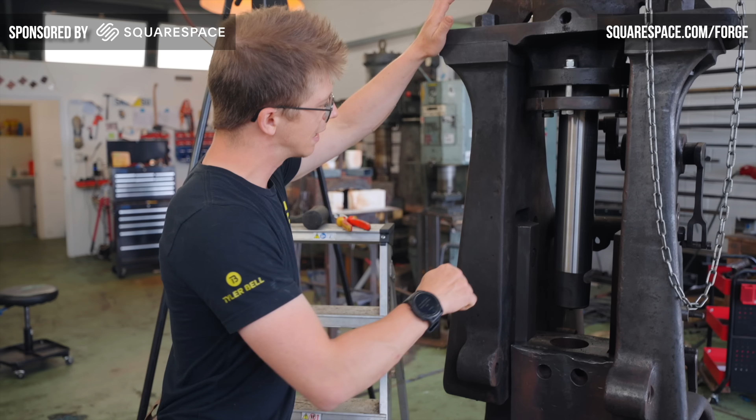This is episode 438 of working on this steam hammer. Now, we put this shaft back in yesterday, squeezed our graphite gland packing inside of the bottom of the cylinder, but we then noticed that it was a little bit too tight. Step one, troubleshoot. So I'm gonna try and loosen off this gland a little bit and see if we can get it squarer, because I think it's bound up.

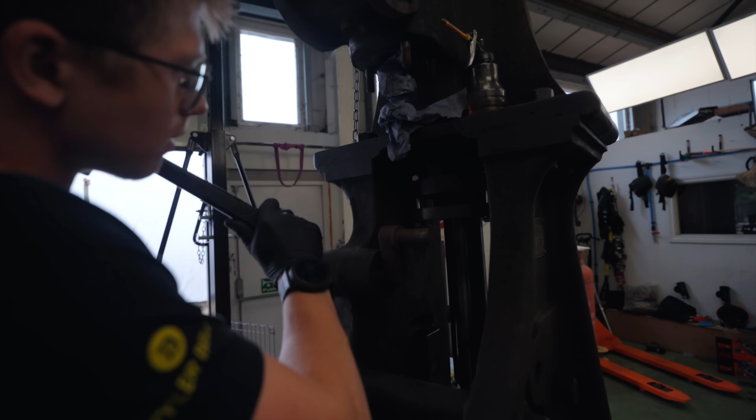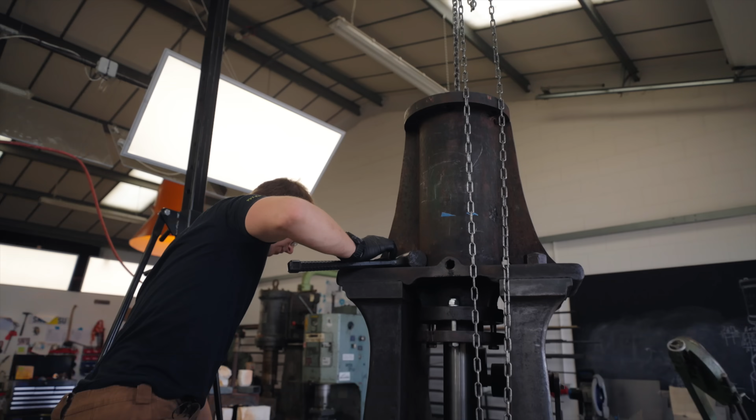You know what I did, Jamie? I just spun it round 180 degrees so that this was in line, and now it goes all the way down. Hey, you know what would be cool? See if we can get it to lift up under air pressure. What do you mean, how? We have ourselves a threaded hole here. We have 100 PSI. The question is, do we have enough volume, and is there little enough leakage that it would actually lift it? Let's see what we can do.

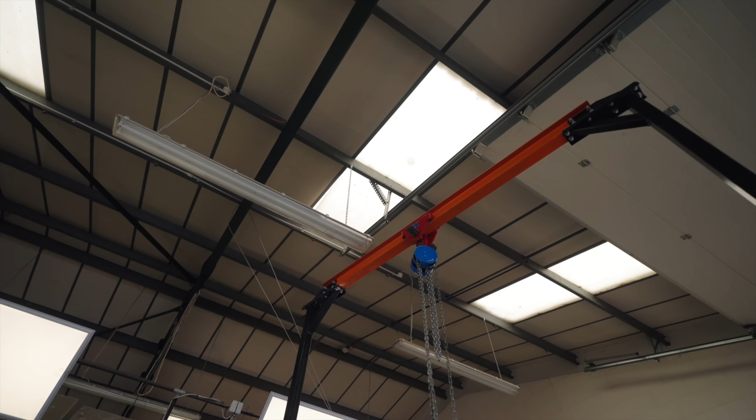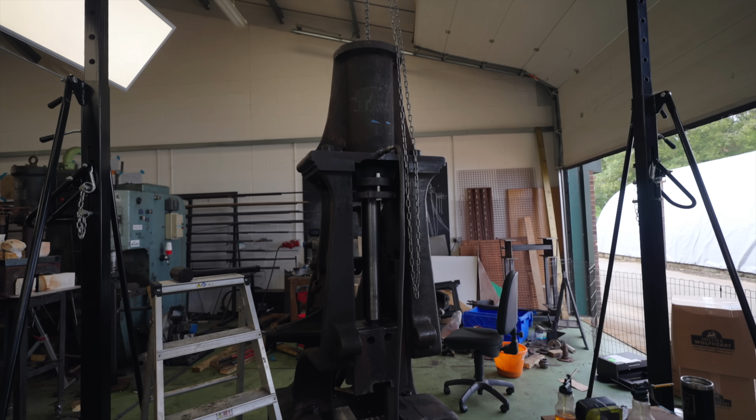Jamie, can you imagine? We open up the air pressure and just shoot the ram all the way out of the cylinder. Straight through the ceiling. There's no chance that happens, but you know, a boy can dream. It did just work out that there's no way this is gonna work. It's just gonna escape out of the back valve. But anyway. Sounds cool, but nothing happens.

Thank you so much. Have a lovely day.

Really appreciate it. Bye. All right, just got some very helpful advice from the great and talented Mr. John Nicholson. Context: this is the gentleman that now owns and runs Massey Forging. The man knows a thing or two or three about power hammers, and he just gave me some advice on what our next steps should be in regards to fitting this ram tup to this piston.

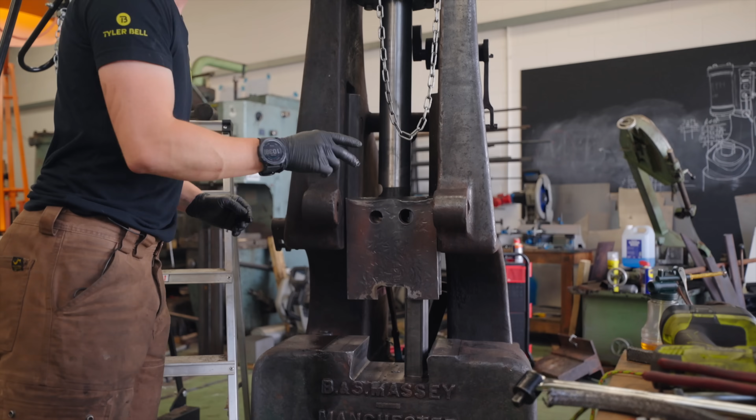Effectively, I have been warned to be careful about how this stuff fits and find out whether it's going to fit right, or whether the fact that we have ground down about 2 inches worth of this taper means that it's not going to stick in here. Because if, when this was big before this shaft got ground down, the bulk of the contact was happening in this bigger area and not down there, it could be that it's loose.

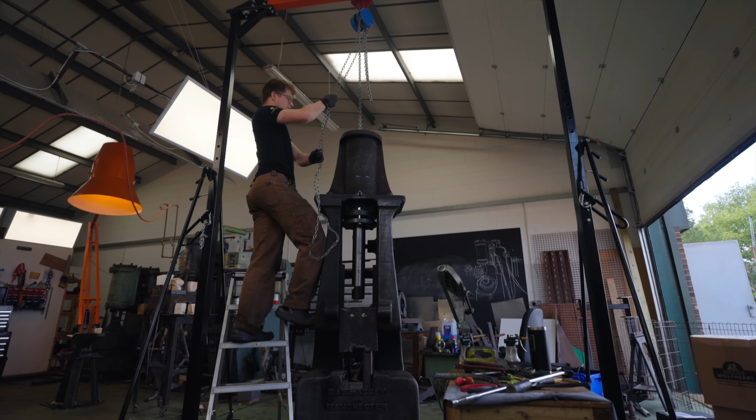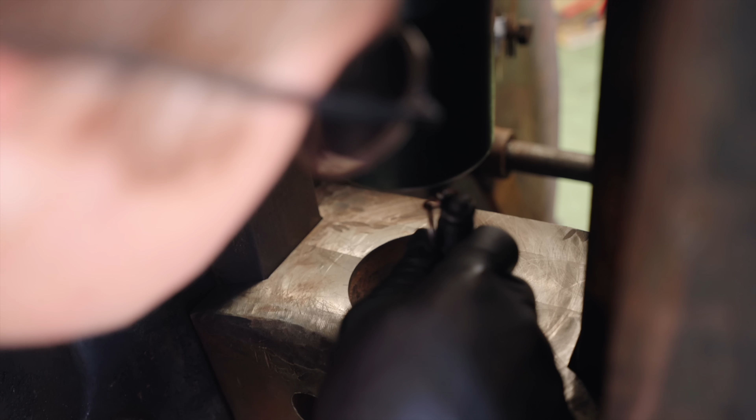But if the tapers match up perfectly fine, it should still be fine. It's just there'd be 30% less contact with the taper that's in there. Remember, this is held to that through this kind of 1 degree taper forced in. A little blue on her. What are we going to say, about 3 millimeters or 1/8 of an inch from fully at the bottom of the taper. Hiya! Contact all the way down there.

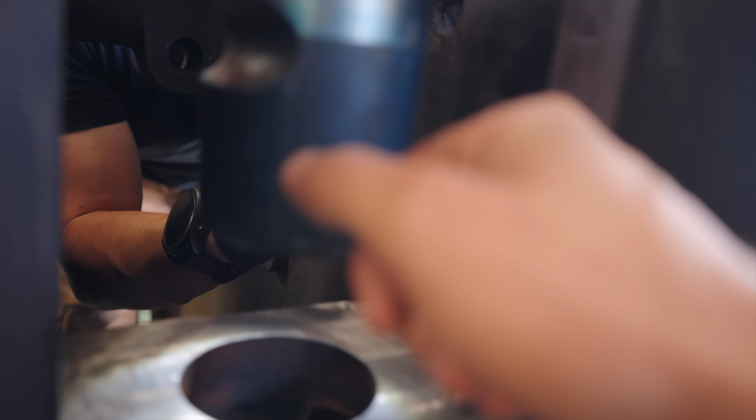What we're saying is barely no contact at all. What does that mean? Barely no contact? Barely any contact? Well, yeah, there's barely no contact. Huh. You mean barely any contact? Well, no, there's barely no contact. Barely no contact means there's a lot of contact. Are you trying to say there's a... What is the use of language you're trying, like... You're gonna help me here, Jamie. Yeah, maybe you're right. I'm saying it's barely touching. Oh, so the opposite of barely no contact.

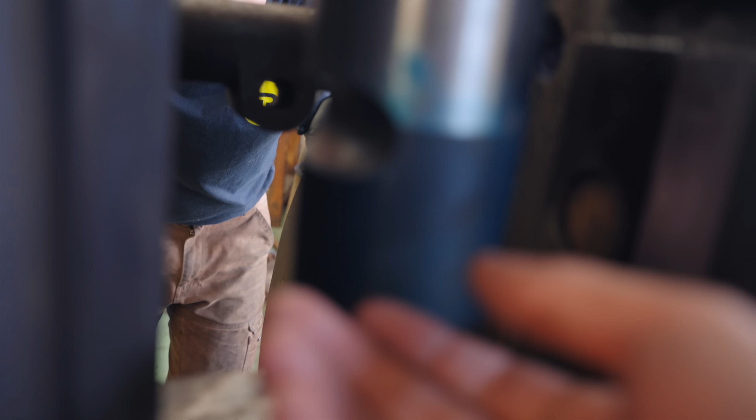This time around we're about 1.5 millimeters away.

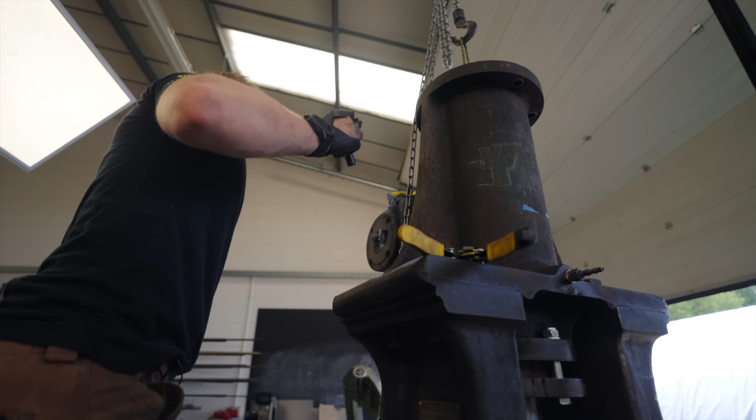What I've been doing now is checking the contact between this and that. We may have to go more in depth on this in the future because the grinding of the shaft has shortened the amount of friction that we get between this taper and that hole. And so if these 2 pieces are coming loose in the future, we've got a little bit of a strategy, a potential solution for fixing that. But for now, we can jam this puppy back in there, and then I think we have a look up here.

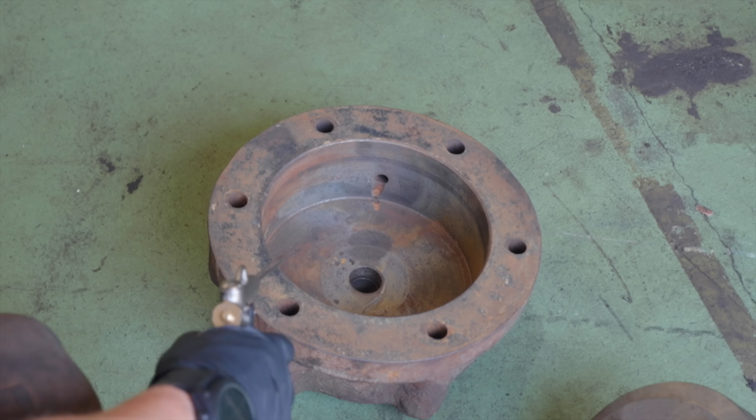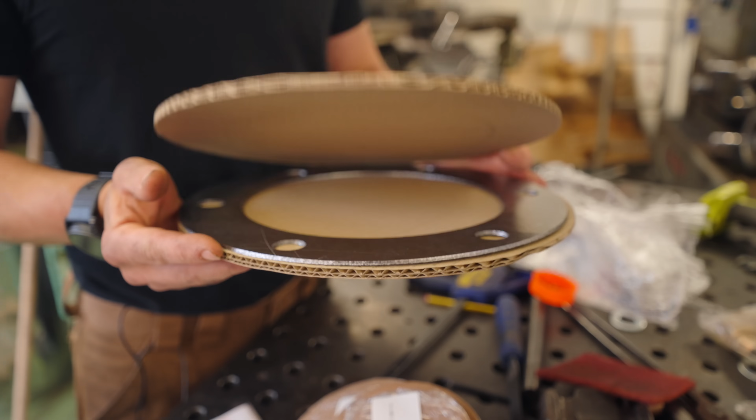All right, keep your fingers and toes well clear, folks. Okay. All right, up we go. Ta-da. Now, gaskets. Remember we bought this bad boy right here? Well, didn't tell you, I also bought something even better. And here, there's the power of CNC. Hallelujah. That's going to be so much better than anything I could have done. Let's pray they line up.

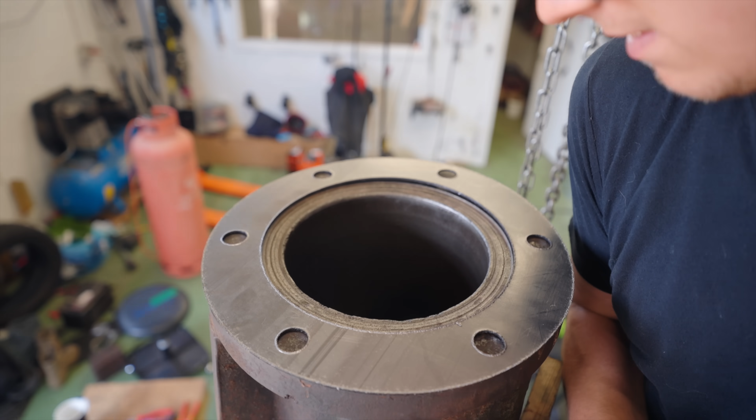Oh, lovely. Doesn't get past the piston rings. Kidding me. We'll put it on first and then put the piston thing on top. I'm very appreciative that one of us here has some sort of brain power. You know what else I should do? Take this thing out. Right. Yeah, the rope and the nuts. Could you imagine? Heavy. Oh, yes.

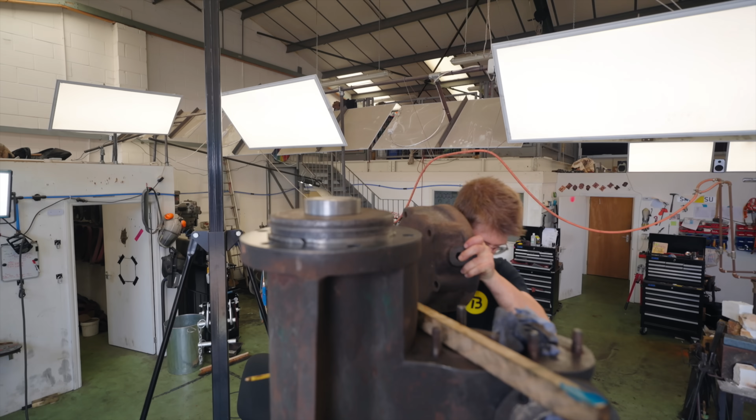Okay, now there's piston rings that need closing. Right, what's rule number 1, Jamie? Don't stab yourself in the eye with the screwdriver. I thought you were going to say don't talk about Fight Club.

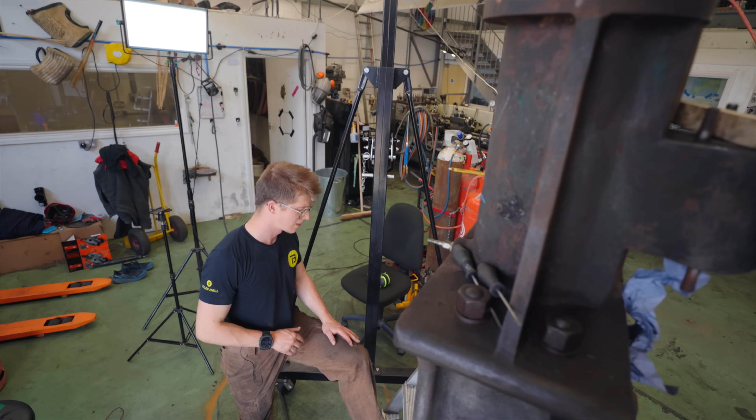Oh. How am I going to pinch those piston rings, guys? Maybe I should have assembled it upside down? But then how would I get it on top without it falling out? What, like putting a glass of water on a table upside down? It's exactly what I would need to do. Isn't there a magic trick to do that? You could just watch that and use the same concept.

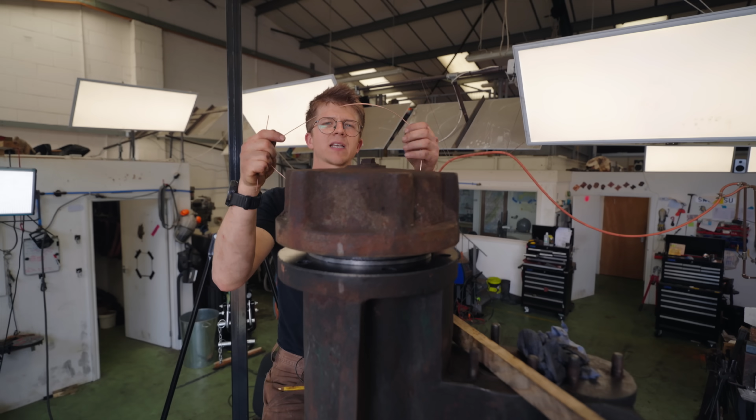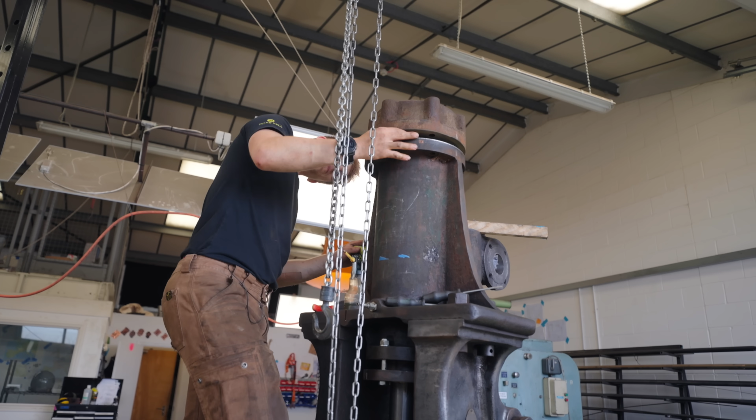It's like I need a big Jubilee clip. A big Jubilee clip! I'm gonna be right back. I'm going up to the office. 2 Jubilee clips. It's still not big enough. You don't think? Is it not big enough? No. Well, we can use it as inspiration. Woo! It worked! Look at that, it's down. There's one long bolt. Maybe.

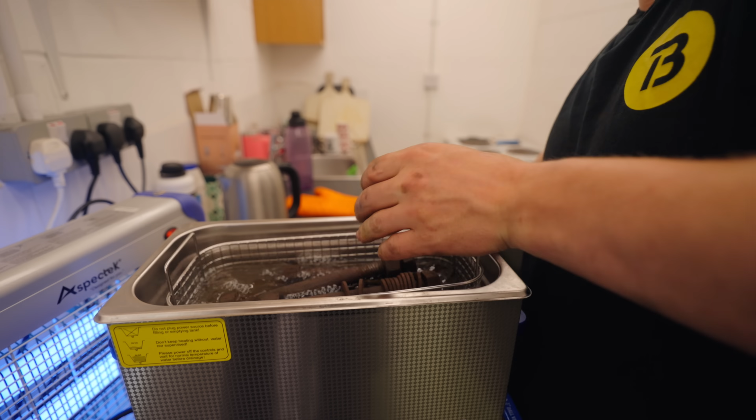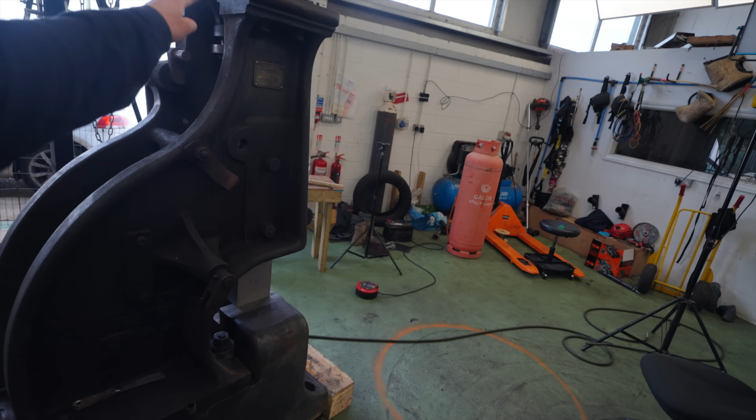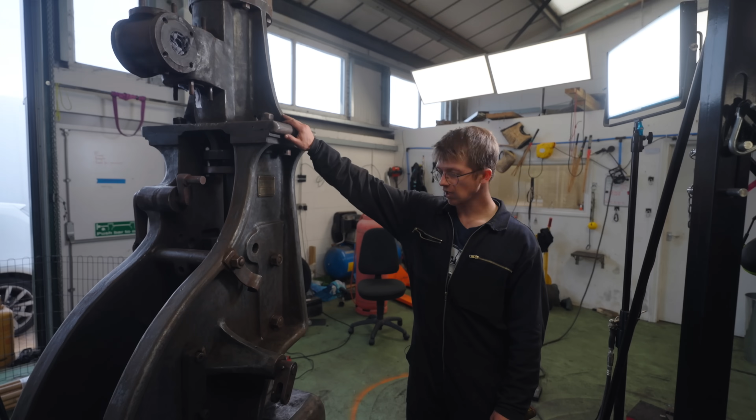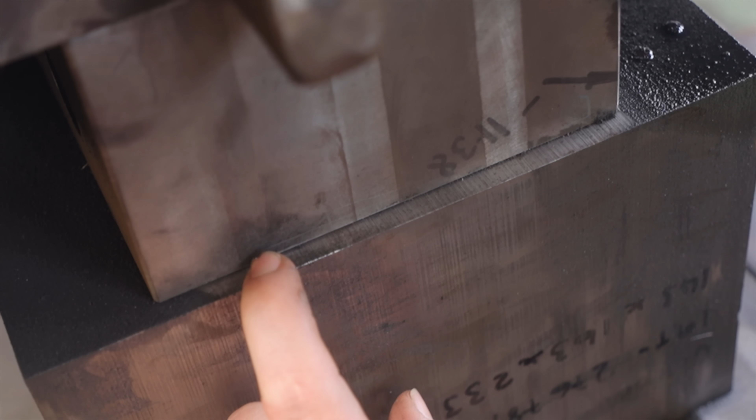Righto, before this thing gets put together anymore, we have to make the other side match this. More wire wheeling is required. I've made headway here, getting the bulk of it off. It's time to get this bottom die cut. Now, there are some important things that we need to consider, which is 1, I want the top and bottom dies to be the exact same width from front to back. This is sawn material, so it's cut with a 3mm tolerance. And so of course, it's not perfectly square, and that's completely normal. So you'll see that we're currently about 5 or 6mm, about a 1/4 of an inch proud on this side. So we've got a lot of material to take off there.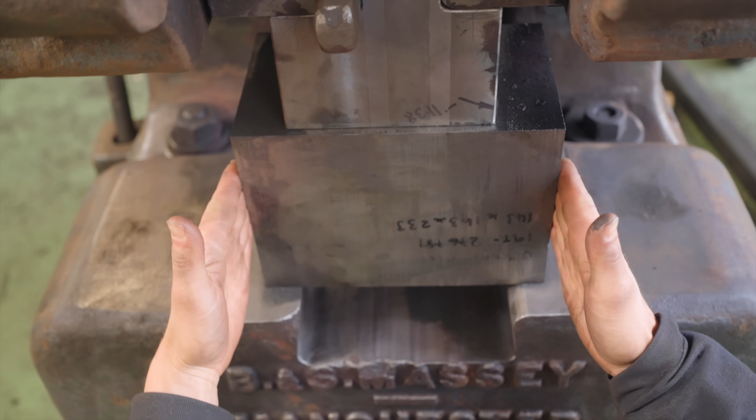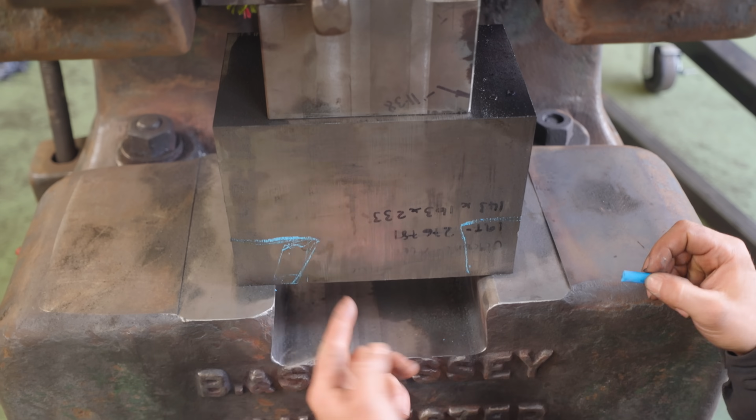The entire block needs to be squared, but also I need to make sure that this block sits perfectly in the middle, this way and that way, to that die. And what's going to be crucial for that is where exactly we cut this dovetail. It's less critical over here, because of course, once that's cut, we're gonna put a key in this dead space. We can make the key fit after the fact, like we did up here, easy peasy lemon squeezy. But if this is off relative to that, that's not going to be centered.

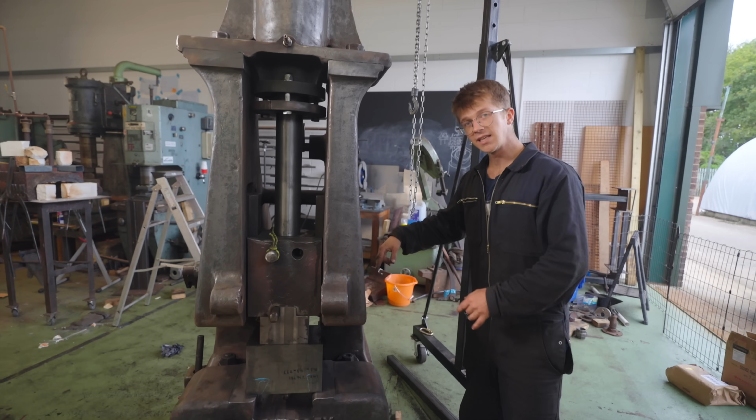And we must remember that despite our best efforts to cut this dovetail in as straight a line as possible to this base, i.e. not like that, not like that, there is so much room for misalignment. Remember, this frame is just installed with 4 bolts on rails. The whole thing could be twisted. This top or ram head was an absolute mess with no square, nothing on it, which means that that die might not be square to the frame. The frame might not be square. There is absolutely nothing to go on that is perfectly square, but we need the dies to line up just right, and we can't have any misalignment between these 2 contacting surfaces.

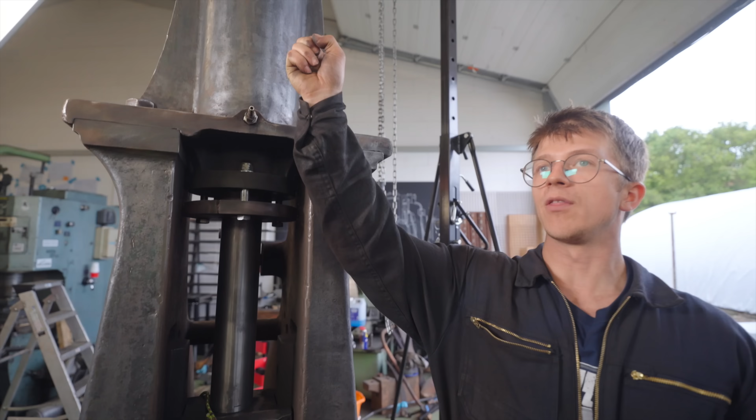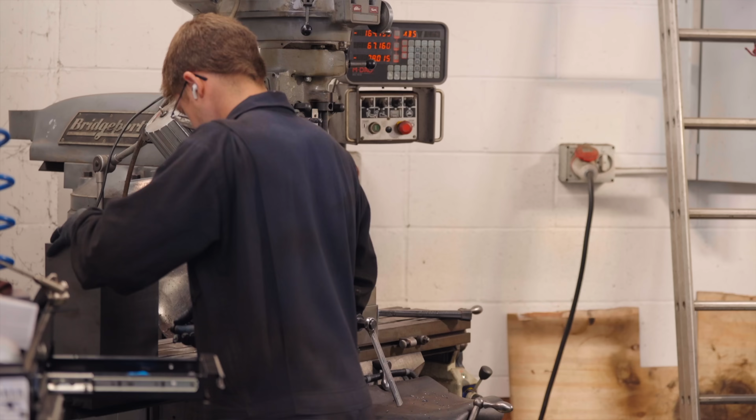Any sort of misalignment is going to make these twisting forces when the hammer strikes. Twisting forces when the hammer strikes is going to cause excess wear on these guides. It's going to cause excess stress on this piston rod. The result is it wears the cylinder more, though this machine ultimately is just a lot of force slapping steel together. If it's not done right, that huge amount of force is going to be used to break itself apart. So making this bottom die is a very, very critical step. And with that, we're going to take to the Bridgeport and I'm going to start squaring this block.

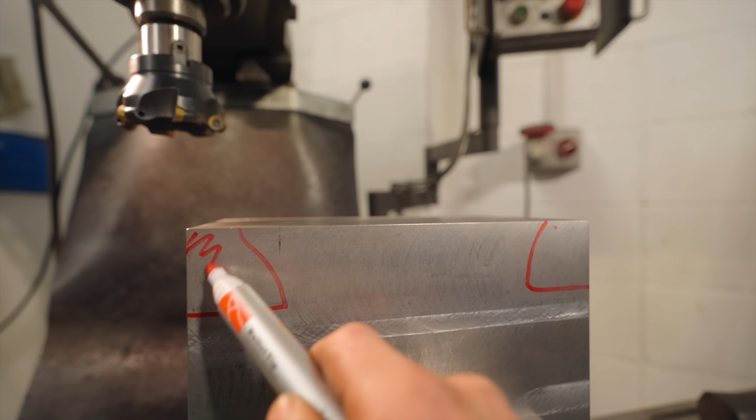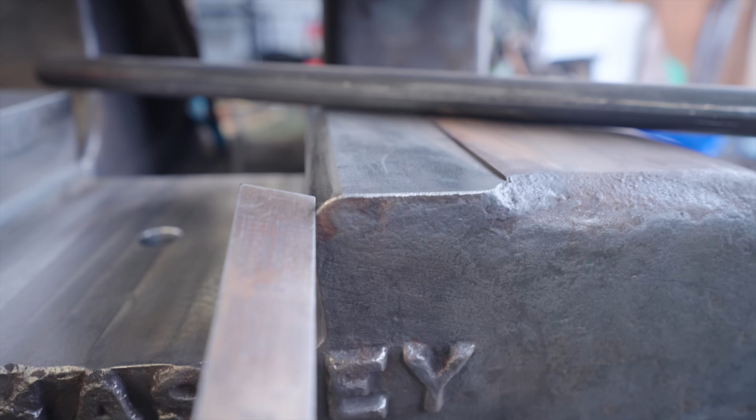Oh yeah. That's what I'm talking about. That's a big, beautiful block of squared steel. We now have to cut some dovetails in it. All of this has to go away. Now you might ask yourself the same question that I asked myself, which is, how on earth do you calculate exactly where to put your dovetails? It's not like I can just come across here with a ruler and give it a measure, because the fact that there is a radius here is a big deal to any datum to reference from. Even just a chamfer would change things by a millimeter or two, let alone the fact that we have radii at the bottom.

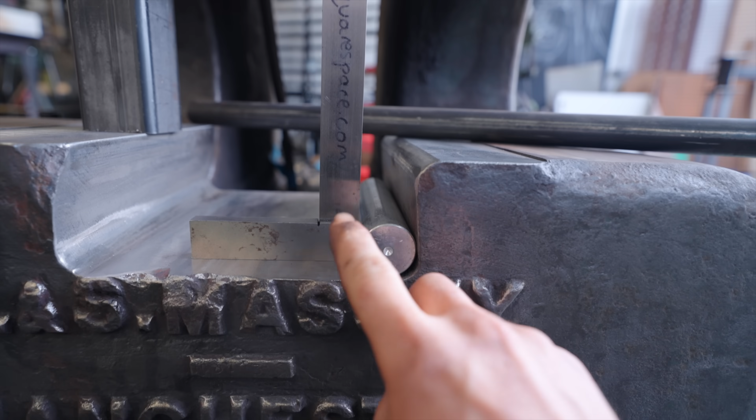So as the die block needs to sit perfectly centered, how do we find a reliable datum? Here is what I'm going for. This bit of round bar touches in two places that has nothing to do with any radii in the dovetail design. Touches on the base, touches on the side. And this will give us some sort of a datum to work off of. The way this bar is set up, it is 6 millimeters off the edge of the top die.

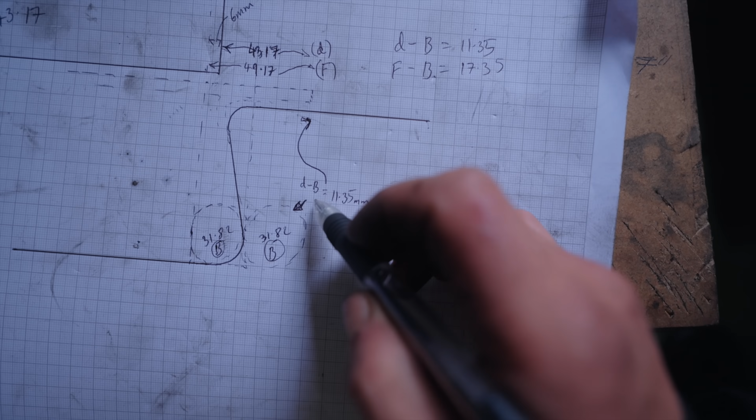And so I took to the pen and paper in order to do some sketches to make heads or tails of it. And when we stop thinking about the inside corner of the dovetail, but we think about the outside for the die, I think that we need an offset of 11.35 millimeters. And that'll be for when this gets moved to the outside corner of the male dovetail, relative to the far outside edge of the side of the dovetail.

Goodness, I have no idea if any of this makes sense to you. It hardly makes sense to me.

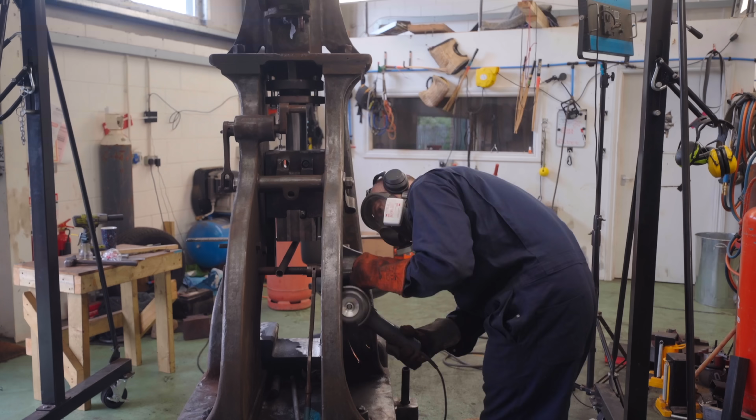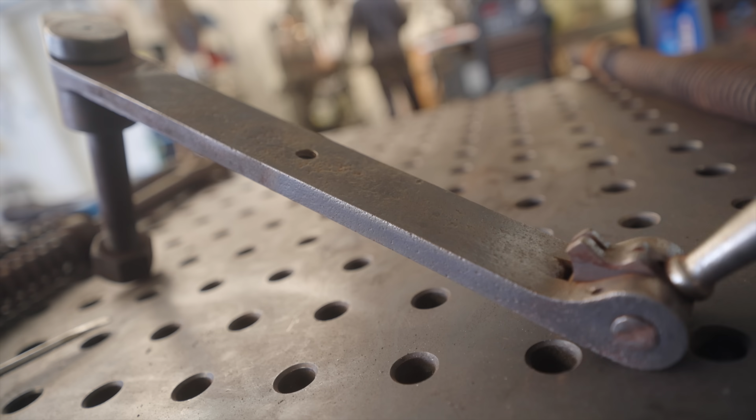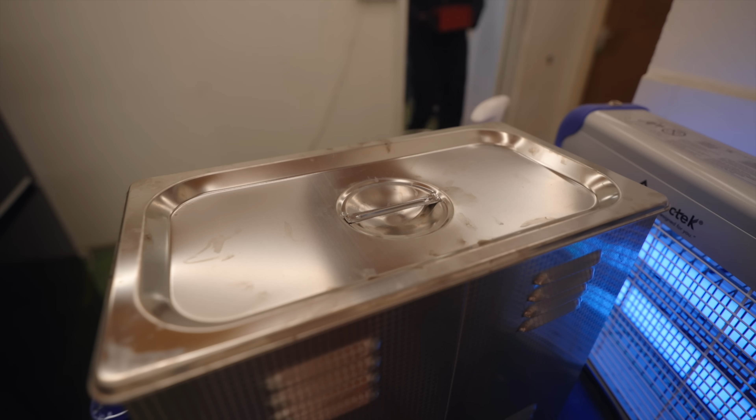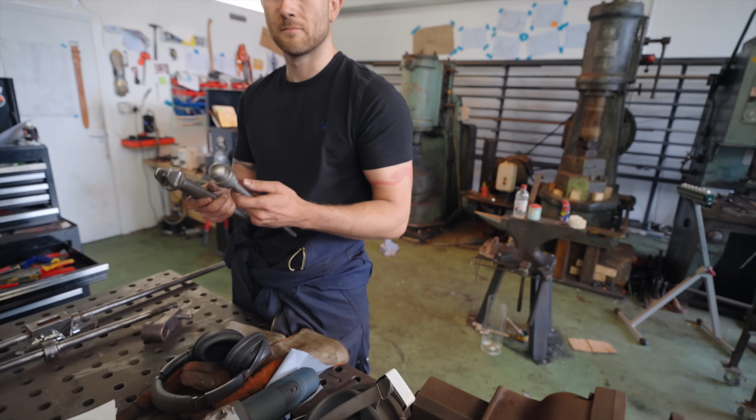Now, while I've been at the mill, Jamie has been cleaning everything. Right, we just got to twist the head on the Bridgeport, start cutting dovetails. But I'm gonna jump in, help Jamie with some of this cleaning, get stuck in there. Oh, look at those parts, so fresh.

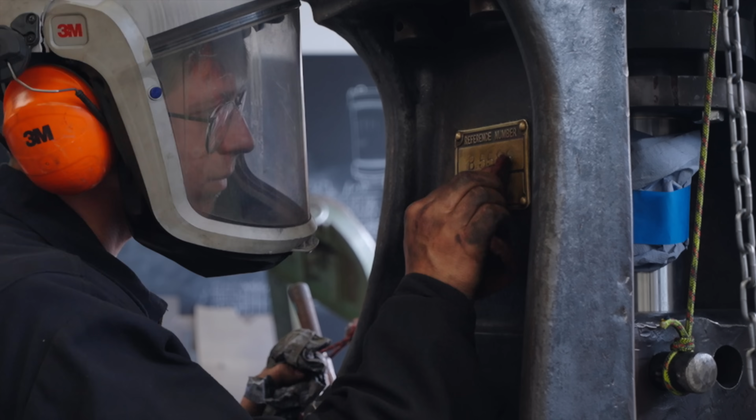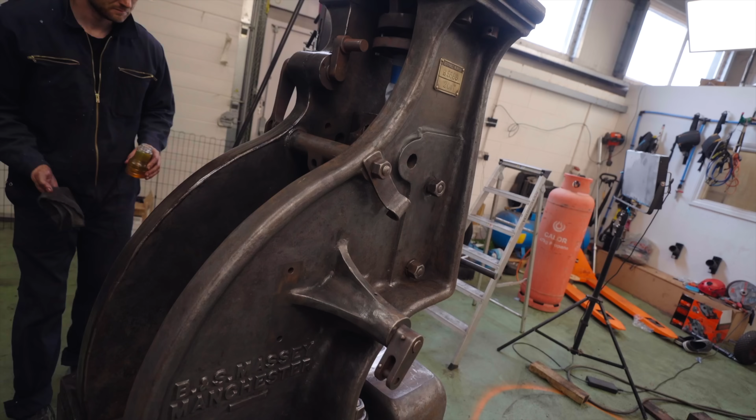This little tag restored to its former beauty. Oh yes! This, at some point in time, was property of Jarrow Metal Industries Limited. Who knows if they're still ticking. Have a look at how good this is looking. Little coat of machine oil on it. Oof, lovely work, Jamie. It's looking pucker. Isn't it just?

And I've had a wash, and I still look like this. You haven't had a wash. I have had a wash. No, I don't believe you. I'm just going to wait to have a proper wash when I get home, because it's not coming off.

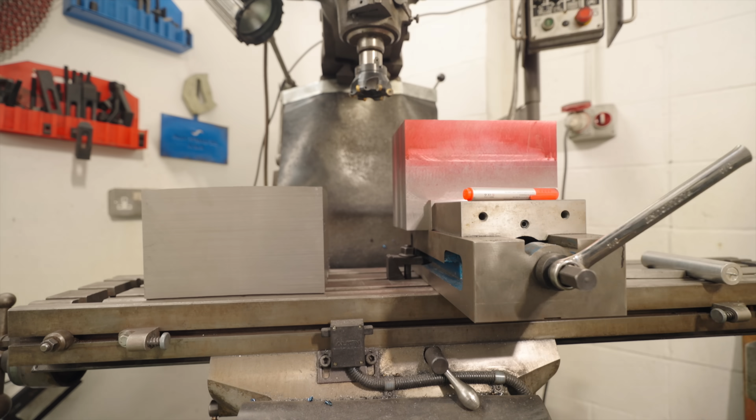No, you're not seeing double. That's a second block of steel. It's a long story, and it's probably funnier if you just make it up in your head. But I got a couple of days more machining to do.

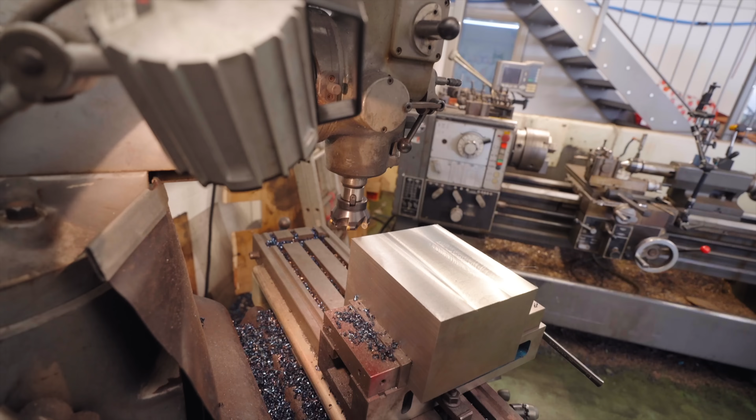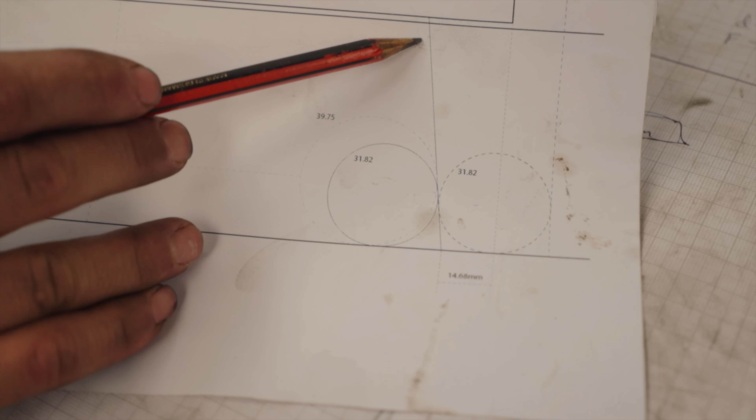All right, so the dovetails. I had tried to do all my maths here on paper, and I decided it was actually getting a little bit too confusing for me. So I took to the computer, and that was actually incredibly helpful, because if you go real close right here, you'll see that that round bar actually doesn't contact in the same place on the inside as it does the outside of that angle for the dovetail. There's actually an offset of about 6 millimeters. This paper is drawn to scale.

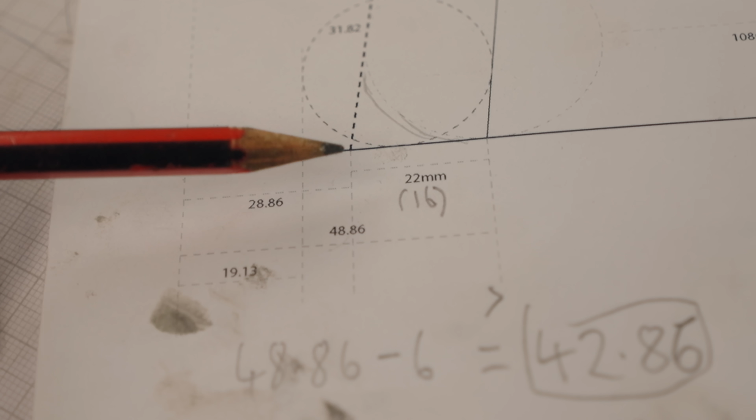And so going to the computer allowed me to plot absolutely everything. I did it in Adobe Illustrator, because my 12-year-old computer won't run CAD, and I was able to determine all of the offsets I needed on both sides of the dovetail, so I knew exactly what we had to do with the block. So I'm bloody crossing my fingers that after all this work, we've made it right.

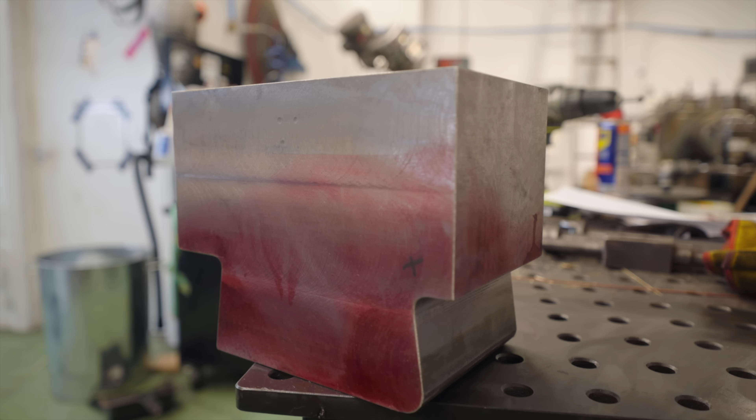All right, folks, the finished bottom die block. Get some. Jamie, what do you think the odds are that this actually works first time and I don't need to machine on it again? Well, hopefully 100%, because you spent bloody ages on it. That is the first time that you have ever had faith in me. No, I'm just saying you spent a lot of time on it, so surely you did it right. Thank you, Jamie. All right, let's go have a look.

Wait, actually first, detour. Jamie, do you see all of the metal chips? Get down there, have a look at this. It's an ocean of 4140 chips. This is very heavy. Whatever you're doing, this is very heavy. I'm running out of strength over here. You know we have to make some Damascus steel out of that stuff.

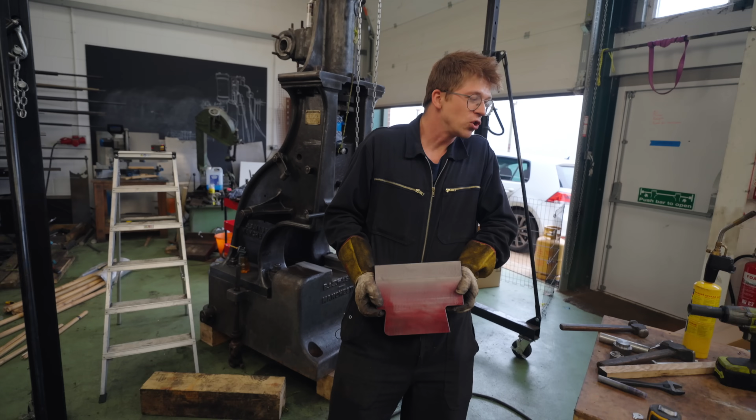Come on, guys. All right. Ow, ow, my finger's stuck. Do you want me to kick it? No, don't you dare. Look at it! It looks so pretty and clean.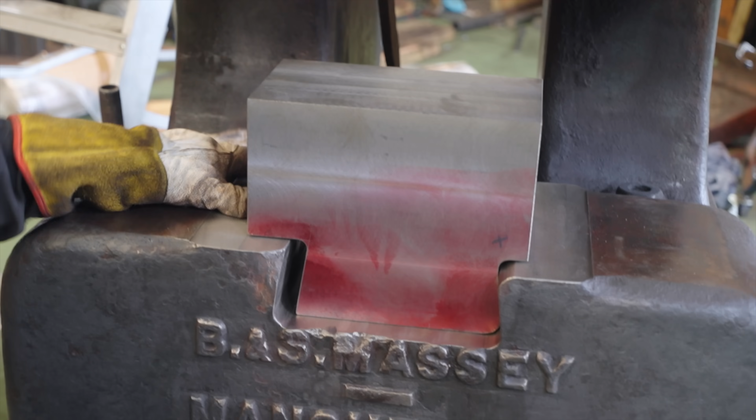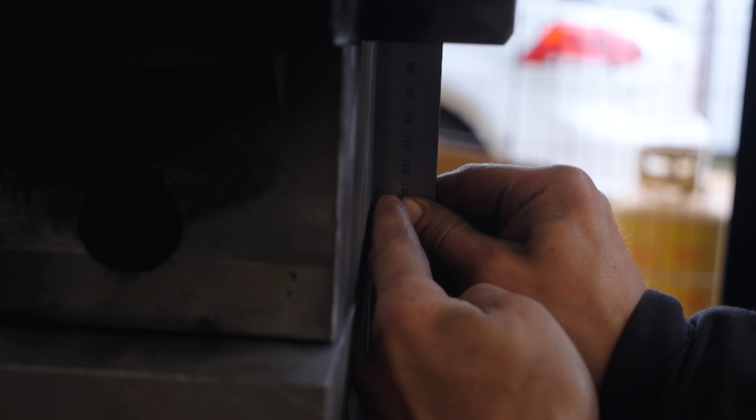Right. Pretty please be square with that top die. Oh! We are out of alignment by about 2 millimeters. They're perfectly in line straight up and down here. And over there, that is the offset. And that is exactly what I was talking about earlier.

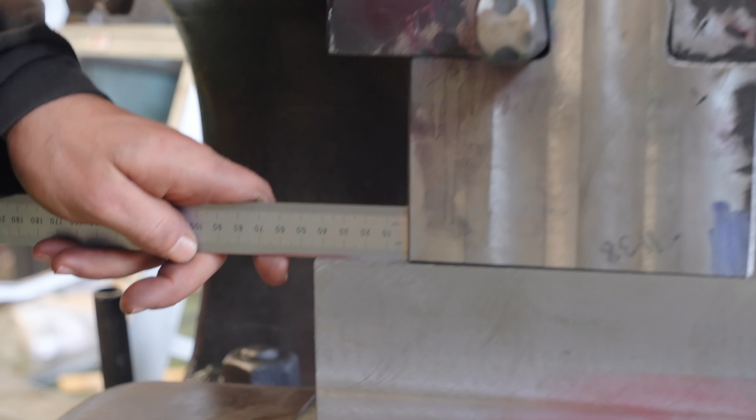The mishmash of all the different things and all the tolerances that I'm not smart enough to have figured out a way to calculate for in advance has now shown me what we need to adjust to make those two things line up perfectly. I will say though, check this. Oh, it's bang on. 43 millimeters. 43 millimeters, it's perfectly in line this way. Thank you for powerful computing.